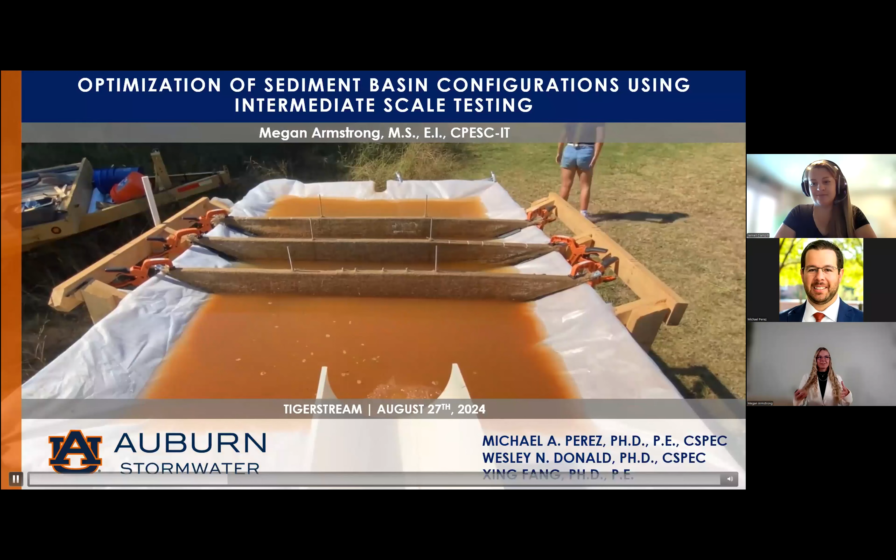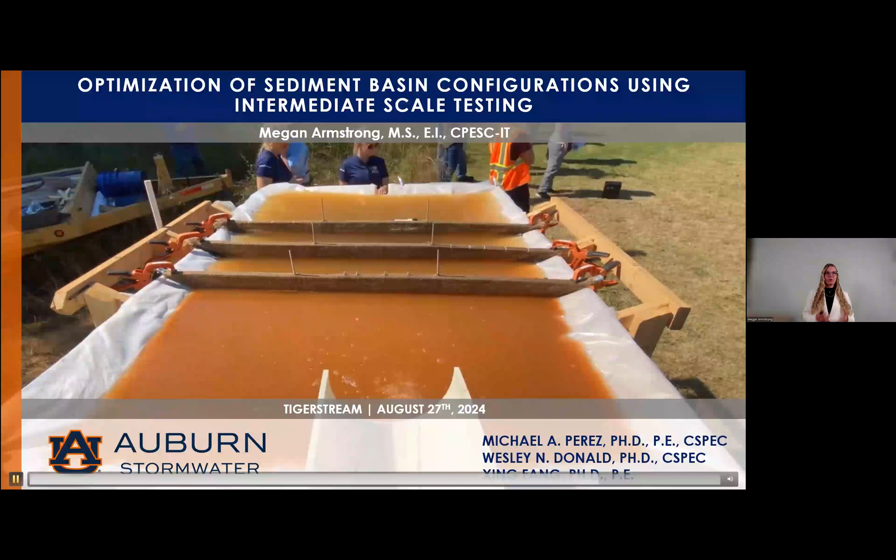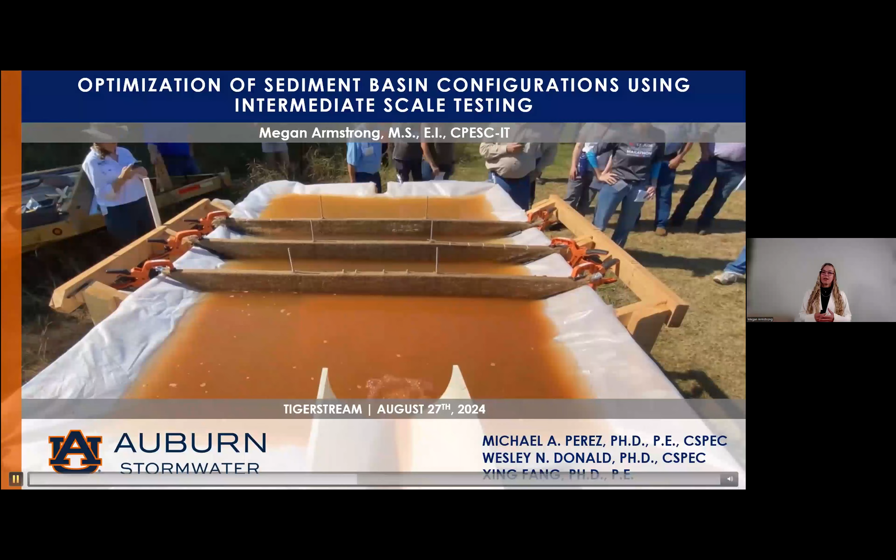So my project was entitled Optimization of Sediment Basin Configurations Using Intermediate Scale Testing. So we used different basin geometries, volumetric and geometric, and different treatment methods to look at how these parameters affected sediment capture within the basin.

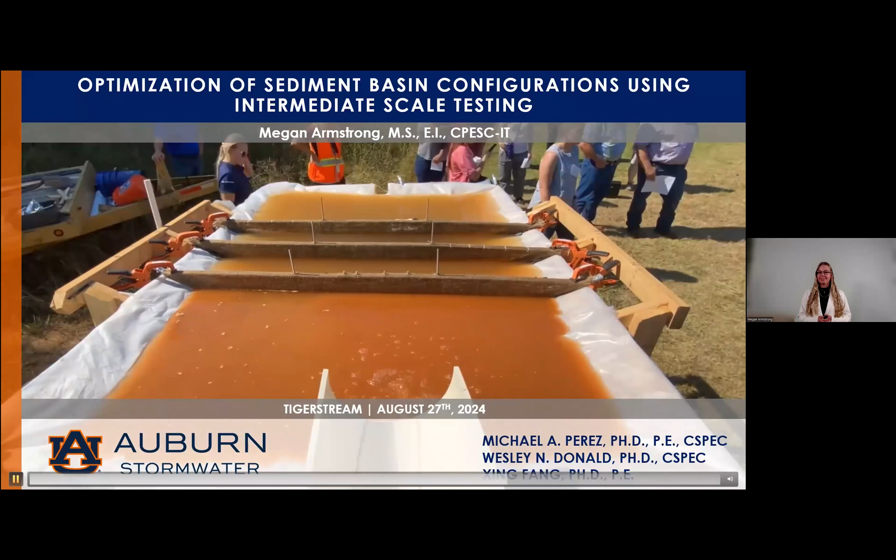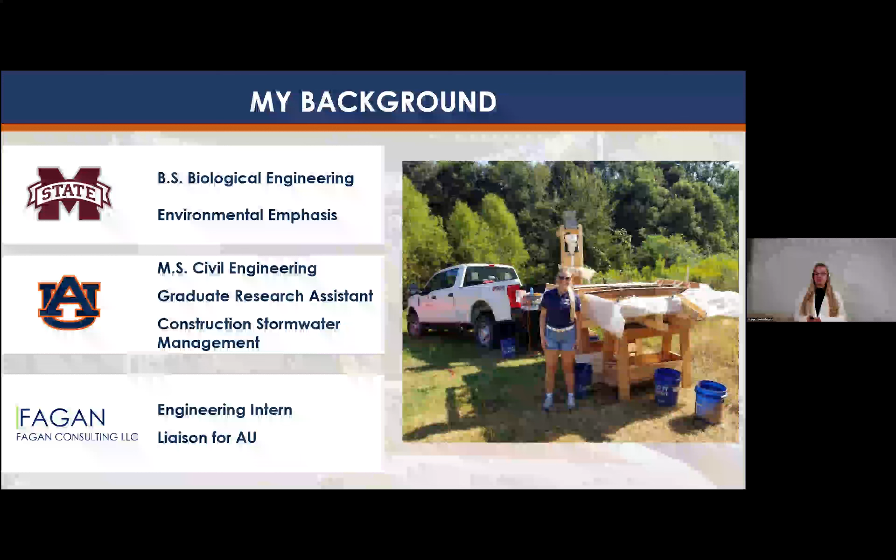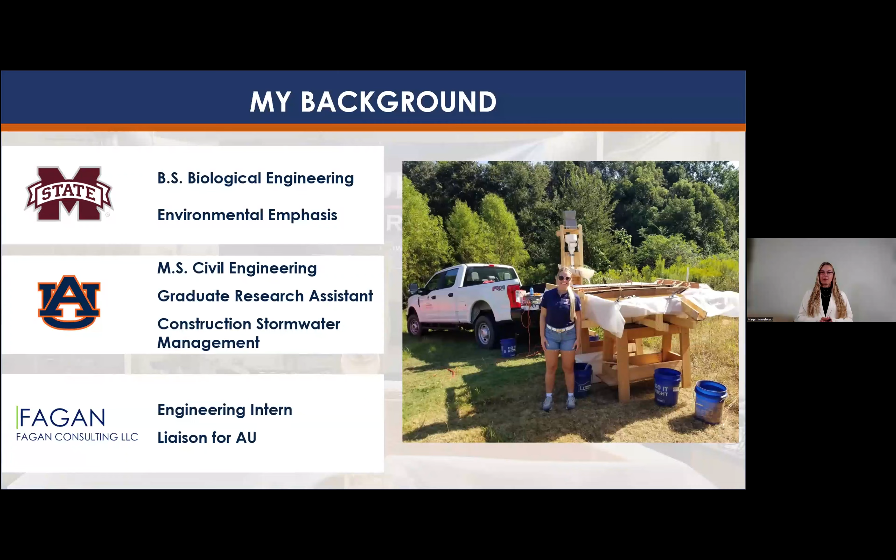So before we get into my project and stormwater in general, I wanted to give a little background about myself. So I went to Mississippi State University and got my bachelor's degree in biological engineering with an environmental emphasis. I recently, in the past year, finished up my master's degree here at Auburn in civil engineering, doing this project in the construction stormwater management group. And now, with my PhD project, I also work as an engineering intern for Fagan Consulting and sort of a liaison for Auburn University to Fagan.

So obviously we have a problem. Over half of our rivers and streams and almost 3/4 of our lakes, ponds, and reservoirs in the US are impaired. So you might be thinking, well, what's impairing these waters of the US? And the EPA actually identifies sediment as one of the most widespread pollutants affecting our water bodies, along with nutrients and heavy metals, which it also can act as a transporter for.

So in the construction realm of things, when you're starting construction projects, you're removing that topsoil and you are preparing to grade your land. And during that time, you might not have as much cover on the land as you would like. So this can cause higher erosion rates versus agricultural or forested sites due to those construction activities. This can lead to 1,000 to 2,000 times higher erosion than natural areas and 10 to 20 times more than your agricultural areas.

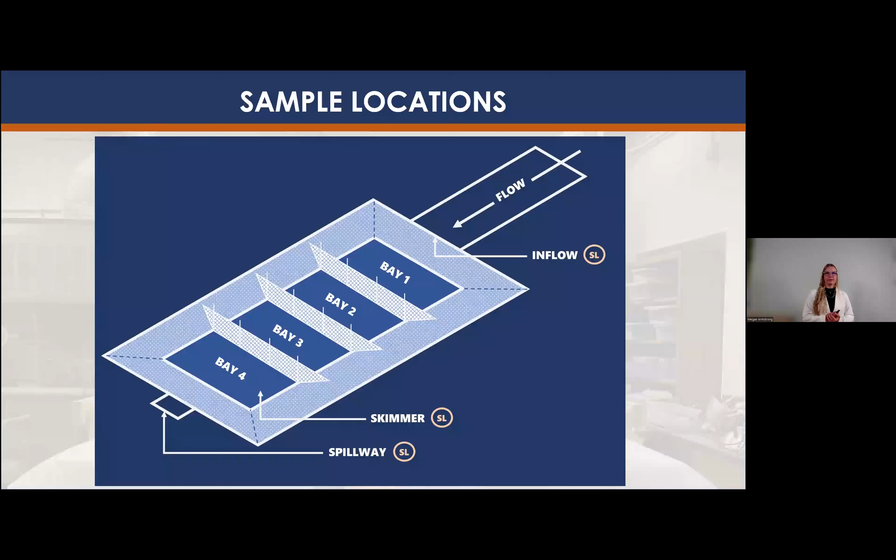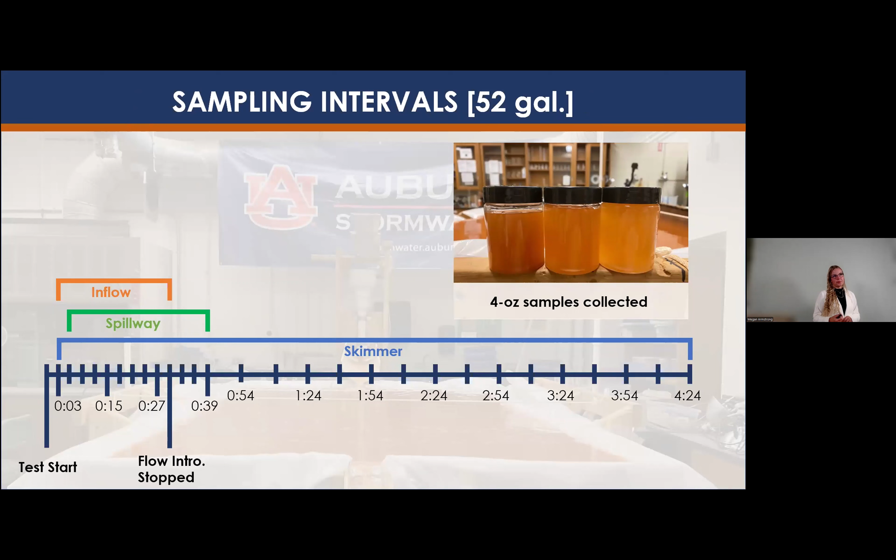The sampling intervals differ just slightly for the undersized basin. This was due to the limited amount of volume that we had, almost half the size of both of those basins. So our spillway overflow started a lot quicker. It started at 6 minutes, and we kept that until 39 minutes, which was the same time that we kept it for the standard and in-channel basins.

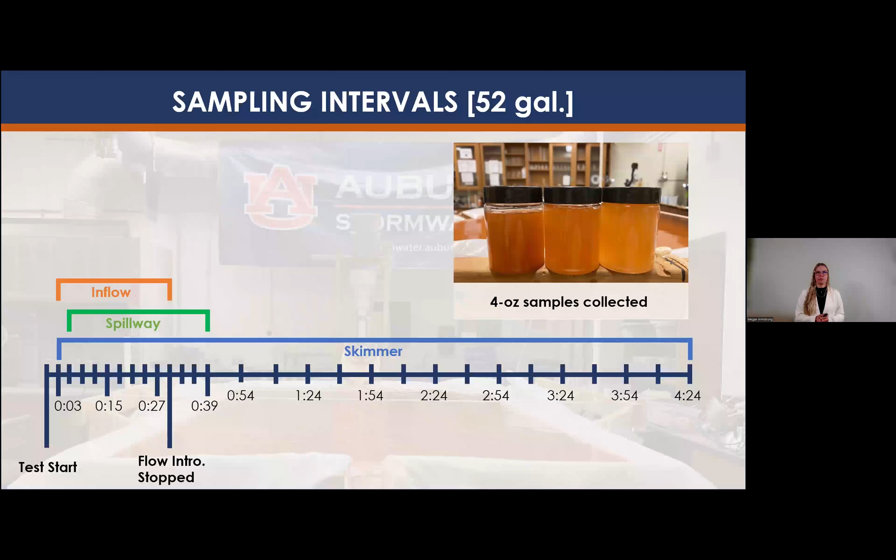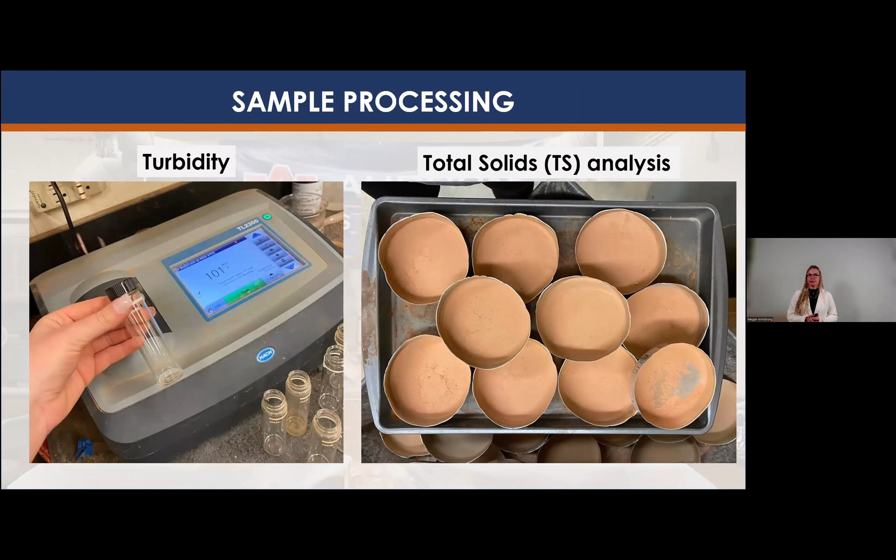For sample processing, we did turbidity measurements and total solid measurements. So this was to give us a correlation, a comparison of how the turbidity and total solids related during the duration of the test. And also for sample processing, we did a comprehensive mass balance analysis to track where all the sediment was introduced into the system and where it deposited in 6 different locations within the basin. So those locations were Bay 1, 2, 3, and 4, so all within the basin, the skimmer, and the auxiliary spillway.

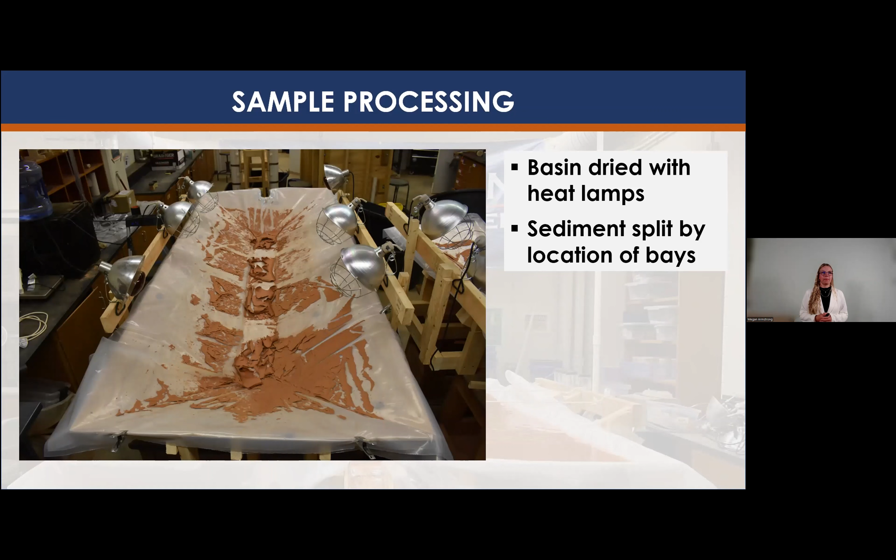So this was settled for 24 hours. The next day we would come in and we would pump it out from the top. We would dry the basin using heat lamps and then split the basin into the 4 separate bays.

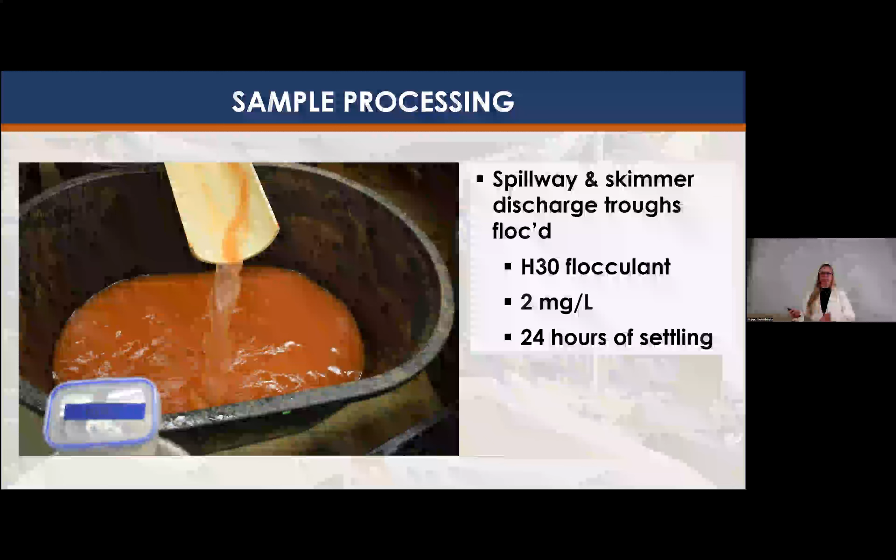As far as the sample processing for spillway and skimmer, these were deposited into large troughs. So what we had to do for these is we flocked them. We put the same flocculant in there that we used for our flocculant testing. And we let it settle for 24 hours before pumping it out. After that, we were able to get it into these metal containers, dry it, and then subsequently weigh it.

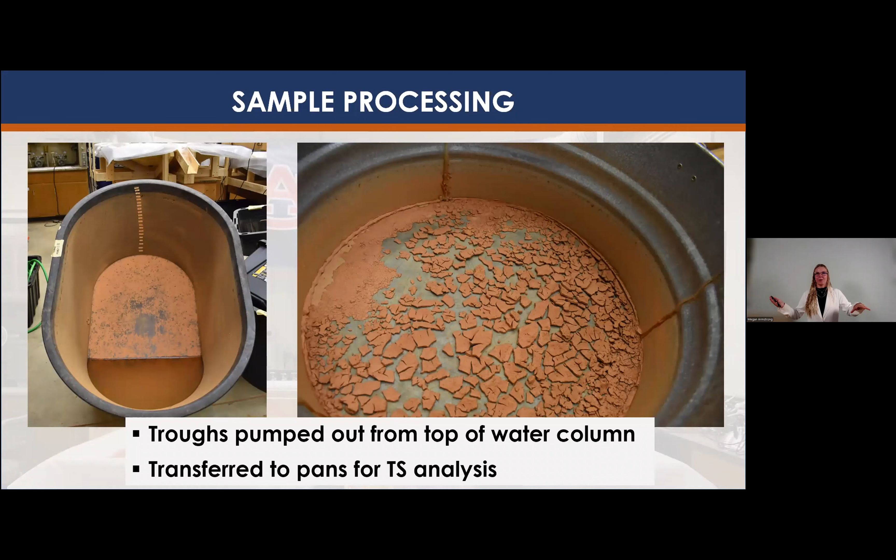So now to kind of get into the fun part, more of the results and what we found in the study. So I'll go through each different basin configuration that we did for standard, in channel, and undersize, and I'll talk to you about them all specifically. So to start off, we want to talk about no treatment. So this is our standard basin design with absolutely no treatments in it. So no energy dissipators and no skimmer.

And the reason that we did the test without a skimmer was due to the spatial constraints for the undersized basin. We could not fit our skimmer in there. So we wanted to make these comparisons directly to that undersized basin. So that's why we did these.

In no way, shape, or form in this study or in this presentation am I trying to say that skimmers are a bad idea. Skimmers are a great idea. We believe that they work. Properly sized skimmers do work. I'm just wanting to lay that out there because there were some configurations that we did not use these floating surface skimmers. So to get started on this, we have no treatment methods.

What this R means here is the amount of sediment actually retained within the basins. And that's looking at how much we actually put into the basin versus how much was captured in these areas. And then we found that for the O here, that's our outflow, our spillway, 16% of that sediment that was introduced left through the spillway.

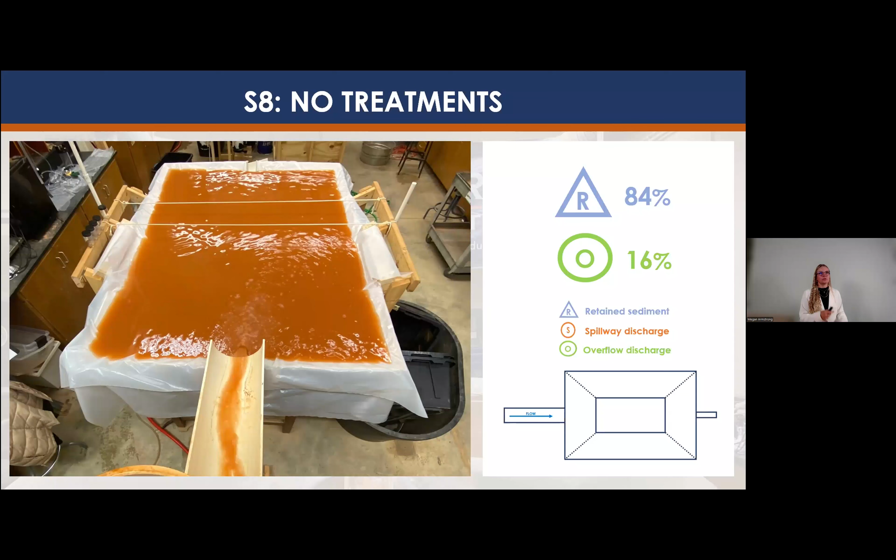So now we have the sediment retained. We have a skimmer, that's that orange S there, and then the overflow or spillway, which would be that green O. And so this is a picture, when I was a new grad student, I didn't realize how much photography we were gonna have to do. So for this one specifically, I just had an older picture, so that skimmer does not replicate the actual skimmer that was used in this basin. We did use the same skimmer throughout all of the configurations that used it.

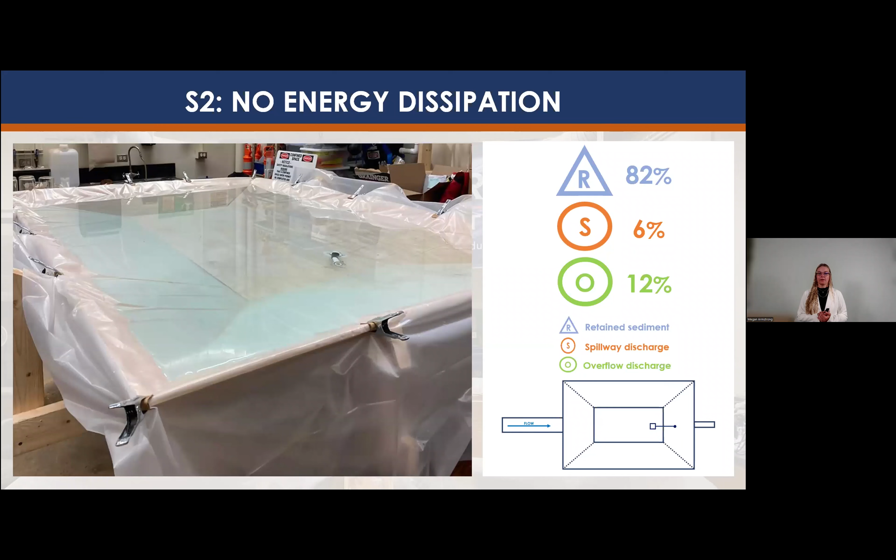So in this basin, we had no energy dissipation, but we did have the floating surface skimmer. And we found 82% sediment was retained within the basin, 6% left through the skimmer, and 12% left through spillway overflow. So in comparison to our no treatment methods that I just mentioned, this is a 4% difference leaving through the overflow. And like I mentioned earlier, we really used the spillway overflow to compare all of these basins to see how much sediment we would possibly be discharging offsite.

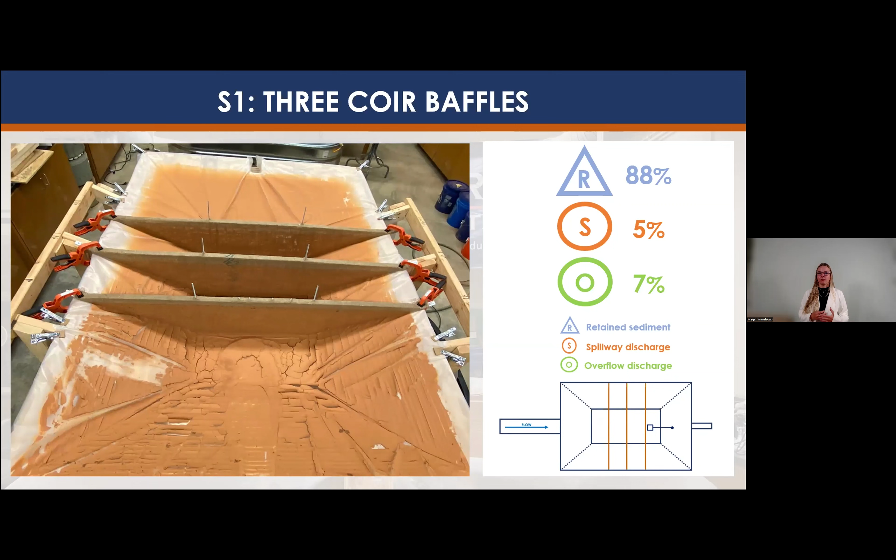So talking about that study that I mentioned earlier from the literature review, it said that the first baffle really did a lot of work in reducing velocity and for sediment retention. So we wanted to look at what would a single coir baffle look like in our setup. So what we found here is that with the single coir baffle instead of 3 coir baffles, we were able to retain 86% of sediment. So that's just a 2% decrease, and just a 1% increase in that spillway overflow to make it 8%. So not too significant of a change here. We saw that 3 baffles could be comparable to 1 baffle.

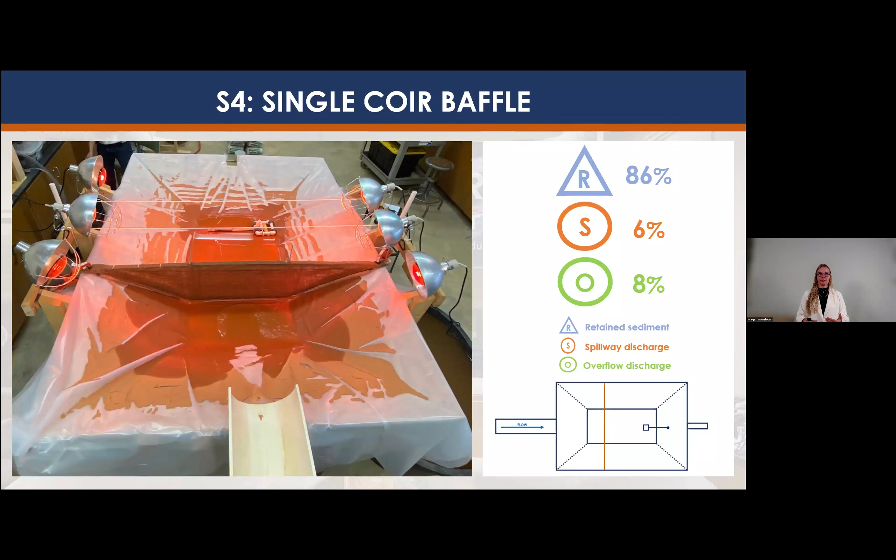Talking about the modeling study mentioned in the literature review, we saw that increasing the flow path from inflow to outflow for sediment particles could increase the amount of sediment captured. So we wanted to try a more serpentine or elaborate flow path, where flow goes between serpentine baffles, creating a longer path from inflow to outflow. With this configuration, we saw 89% of sediment retained within the basin and 7% overflow, so no change from the first three coir baffles as far as overflow spillway goes.

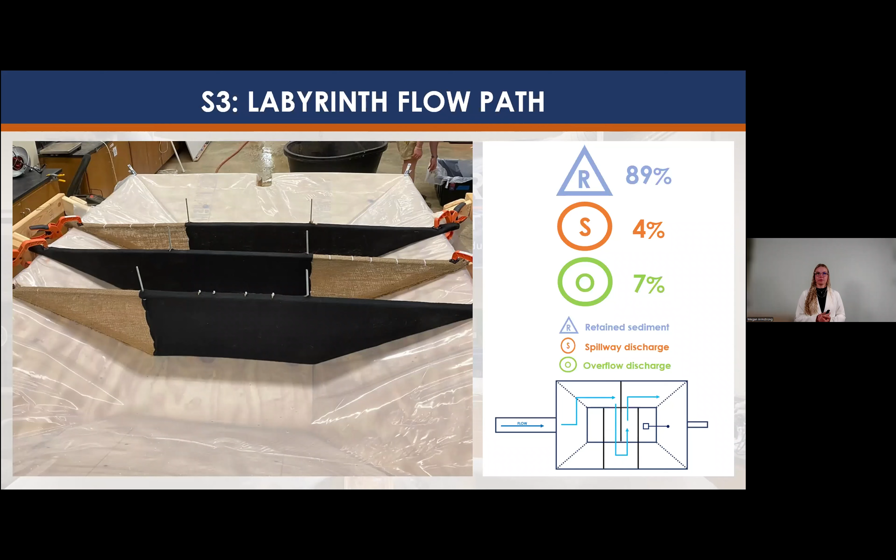Another study we looked at, in New Zealand, showed the effects a level spreader could have on sediment retention, so we wanted to try this configuration. This level spreader is at 9 inches. In future studies we might try a level spreader with different dimensions, because in this one we didn't see any significant results for sediment retention within the basin. It was a little less effective than our coir baffles, but at field scale we would probably change the height of that level spreader.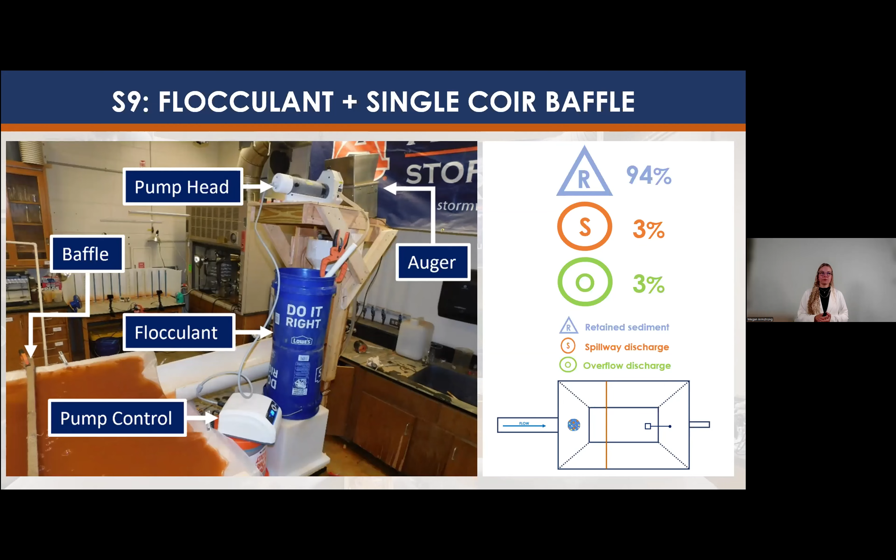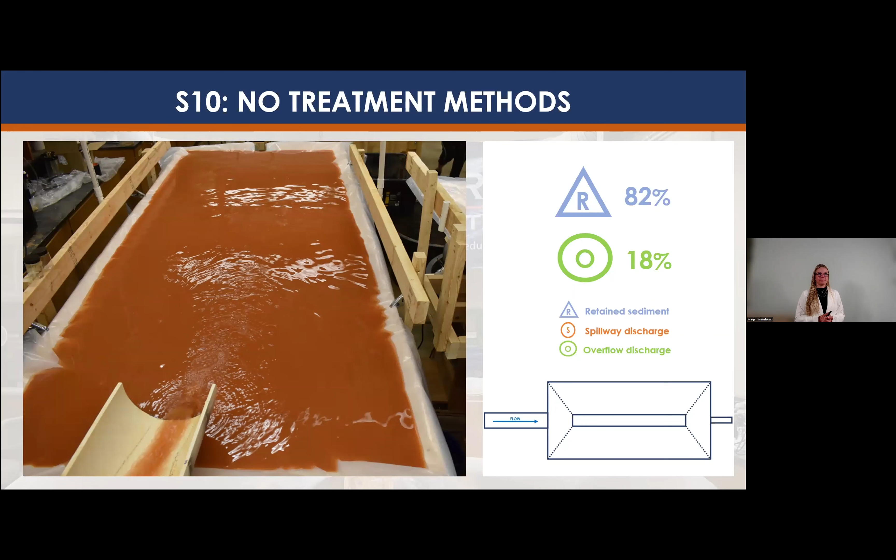Moving on to the in-channel basin, which would be found, say, in a roadway median or roadway channel. Our goal was to increase the residence time, or the particle flow path length from inflow to outflow. We found 82% of the sediment introduced was retained within the basin, and 18% discharged through the spillway. This is a 2% increase in sediment discharged to the spillway compared to the first, standard basin with no treatment methods. We believe this could be due to increased velocity within the basin from its length-to-width ratio, but nothing too significant compared to the standard basin—they worked similarly.

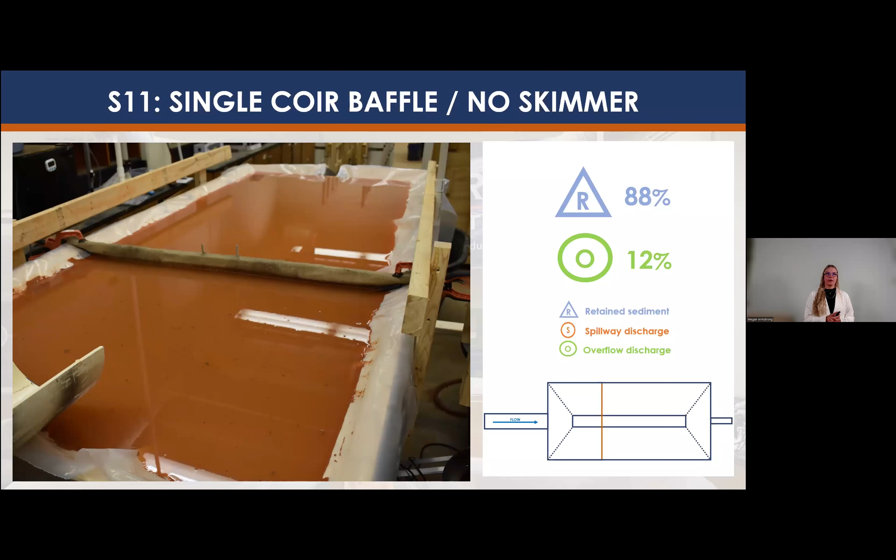So we wanted to try the single coir baffle like we did in the standard basin, this time with no skimmer, to make comparisons to the undersized basin. We found 88% of sediment retained within the basin and 12% through the spillway outflow, a 4% increase in sediment discharge compared to the standard basin with a single baffle and skimmer. That standard basin did have a skimmer, which is one reason the overflow turbidity, or amount of sediment, is increased here.

We also wanted to try the ALDOT configuration, or the ALDOT standard with three coir baffles, in our in-channel basin. We had 86% retained within the basin, 5% leaving through the skimmer, and 9% discharged through the outflow. Again, this was a 2% increase compared to the three baffles and skimmer in the standard basin.

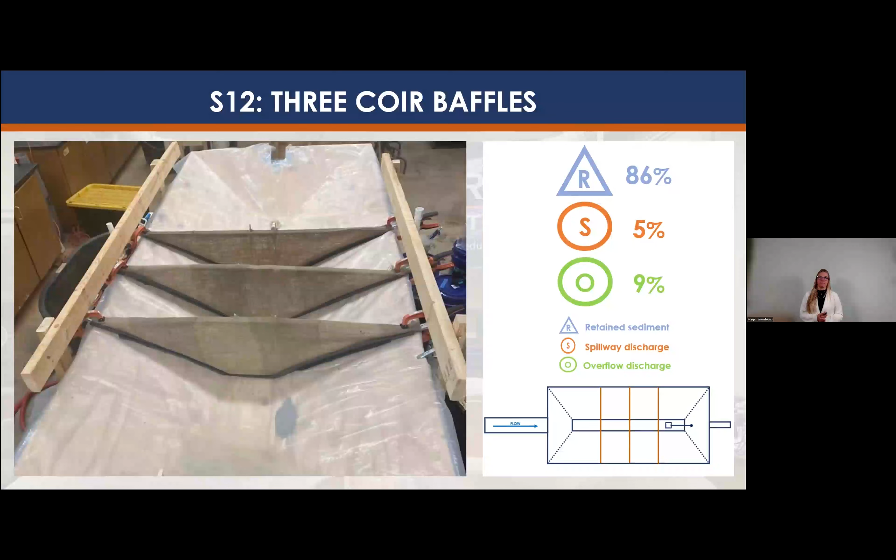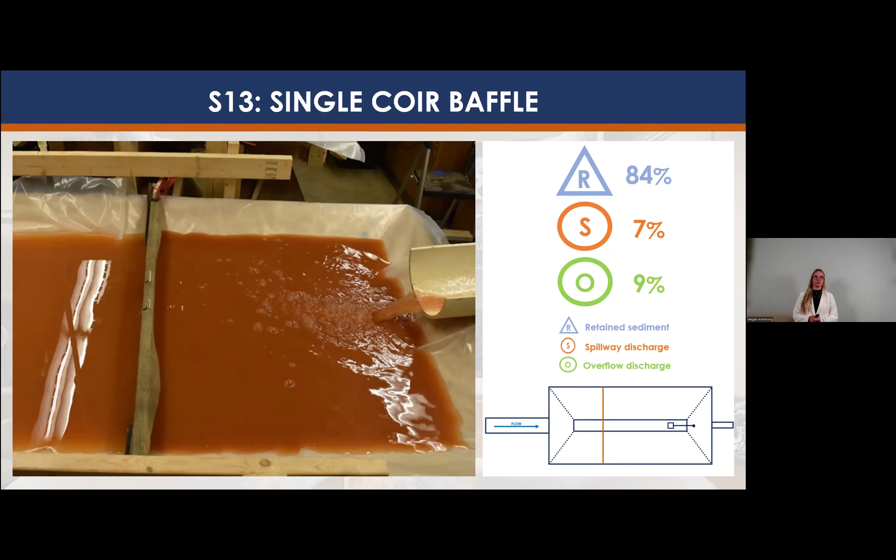We also tried a single coir baffle, which did include a skimmer. We found the same thing again: 84% retained within the basin, 9% overflow through the spillway. This was a 2% increase compared to the standard basin with a single baffle and a skimmer.

We got pretty consistent results with these two basins compared to each other. Again, we wanted to try that flocculant, since we knew it worked really well in the standard basin, so we wanted to replicate it in our in-channel basin. We did a configuration with flocculant and a single coir baffle, this one with no skimmer. You're looking at 95% retained within the basin, 5% through overflow.

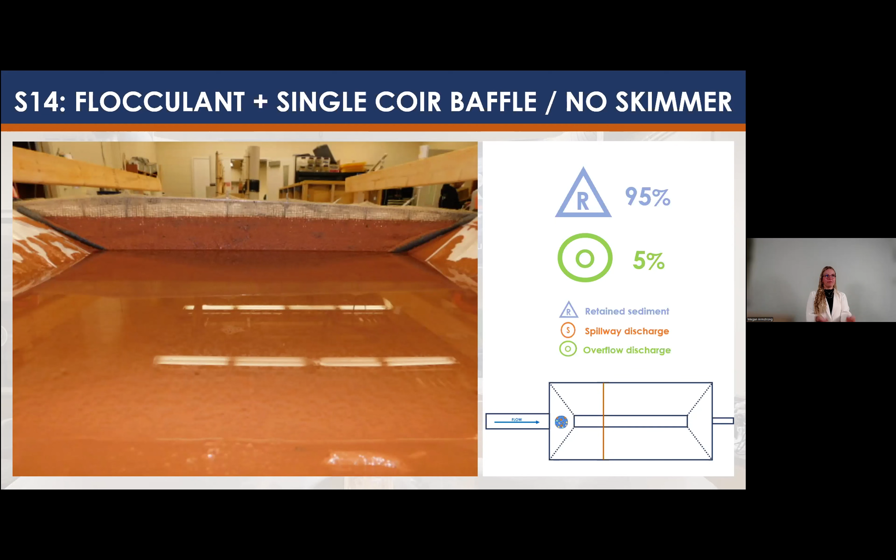Again, we wanted to do this including the skimmer to see what effects that would have. We saw 2% through the skimmer, 94% retained, and only 4% discharged through the spillway itself, which made it the most efficient in-channel basin configuration that we tested.

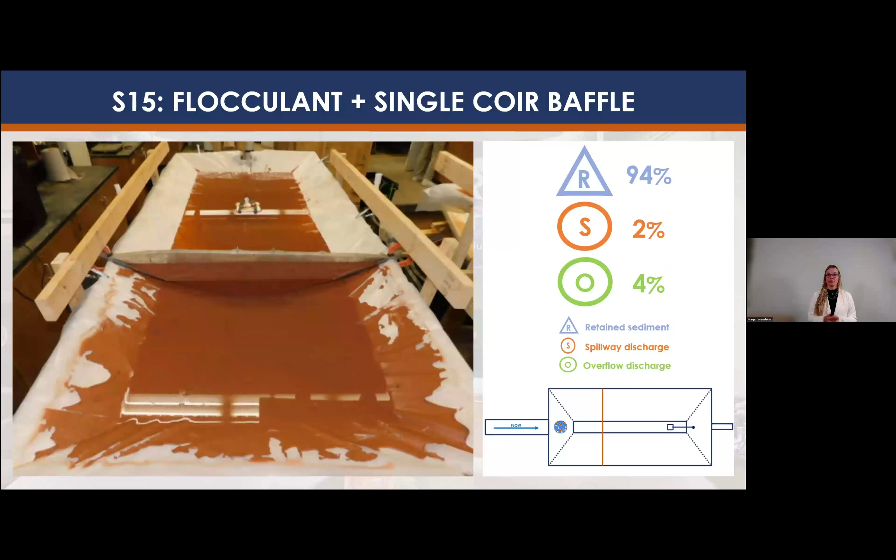For the undersized basin, we were really excited to get to this part. We wanted to see the comparisons between those larger volume basins and the smaller volume basin, and how it would look with no treatment methods.

With no treatment methods, we were retaining 64% of sediment, and 36% was leaving through the spillway overflow. So this is a 20% increase, a huge increase compared to the other two basins that performed pretty similarly.

A 20% increase discharged through the spillway compared to the standard basin with no treatment configuration, and an 18% increase compared to the in-channel basin. Very drastic results here.

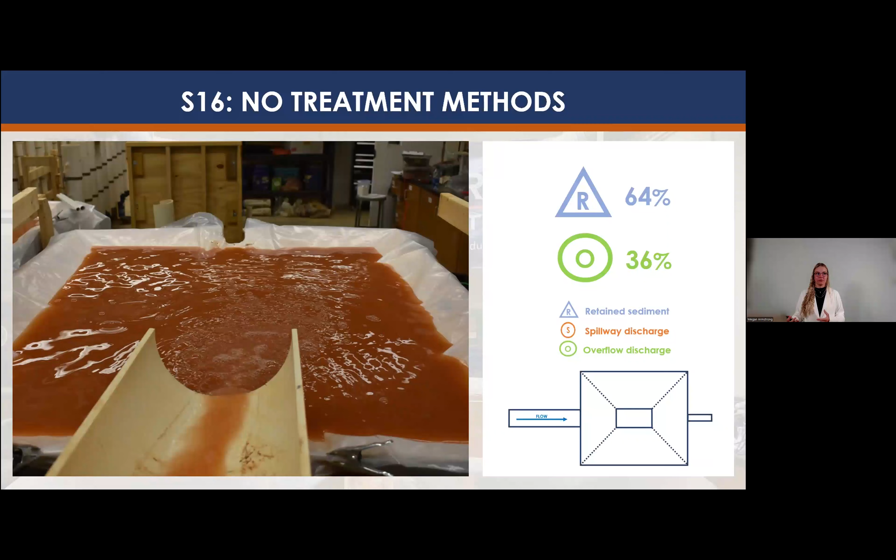We also wanted to try the single coir baffle, since that seemed to work pretty well in our other two basin configurations, so we wanted to see how it could improve sediment capture within this basin. We were able to see 73% retention within the basin, an improvement from no treatment methods at all.

27% was leaving that overflow spillway with the baffle. So a 19% increase compared to the standard basin with a single baffle, and a 15% increase compared to the in-channel basin with a single baffle.

This was one of our favorite ones that we ran. We were really excited to see what flocculants could do for an undersized basin with the single coir baffle. Would we really reduce that turbidity downstream, or reduce the amount of sediment leaving the basin itself? How big of a change would this be?

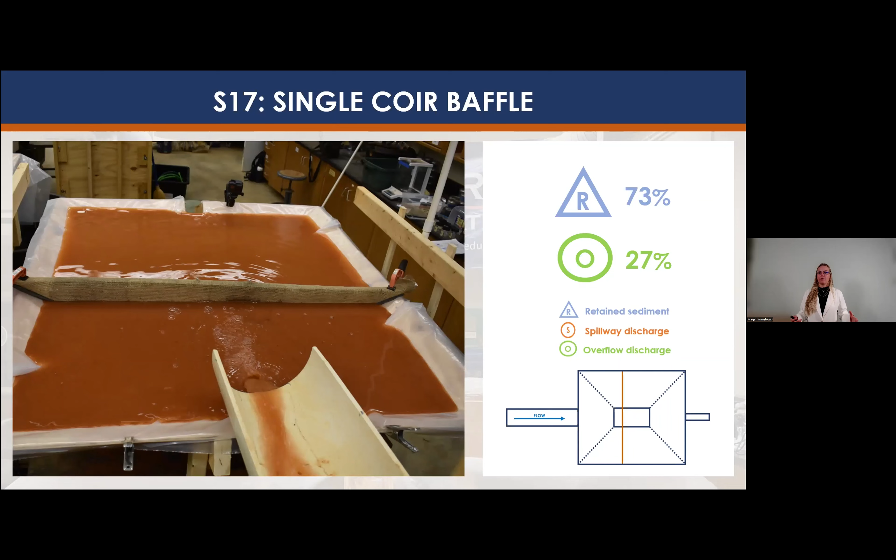For the flocculant configuration, we were able to get 91% of the sediment introduced retained in this basin. This is the same storm volume that we introduced into the standard and in-channel basins, almost 6 pounds of sediment, just like the other configurations. Retaining 91% of that sediment was huge.

We're almost working as effectively as the flocculant installations for the standard and in-channel basin. This is actually an improved sediment retention value compared to the configuration with three coir baffles in the standard configuration, which had 88%.

Here we saw 9% through spillway overflow. Like I said, we use this spillway overflow number to compare across all basins, since they didn't all contain those skimmers.

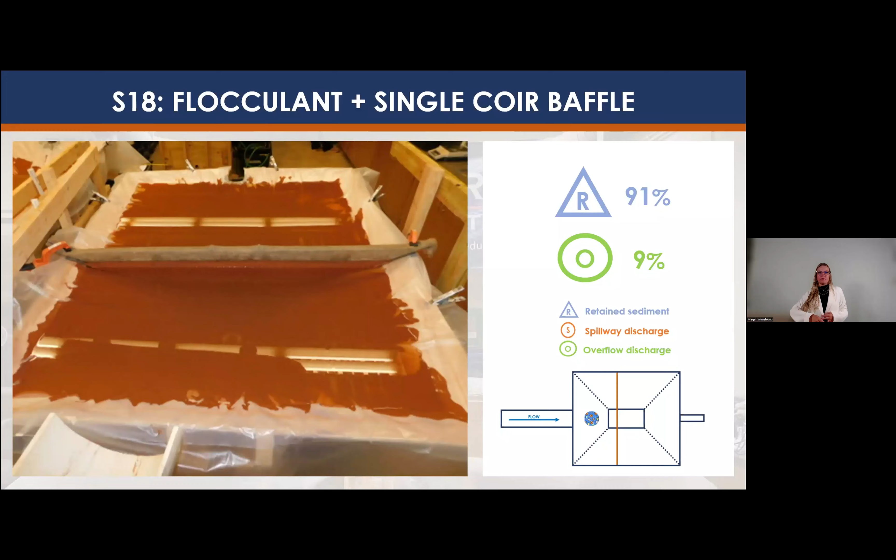So here's an overall efficiency summary for the 18 configurations that were tested. In yellow, we have all the standard basin configurations. In red or pink, we have the in-channel configurations. And in blue, we have the undersized configurations.

You can see from these configurations each of their outflow spillway percentages, how much of that sediment introduced was discharged through the spillway. We really wanted to highlight our flocculant, or chemical flocculant configurations here. We have 3% leaving the spillway outflow for the standard basin, 4% for the in-channel basin, and 9% for the undersized basin.

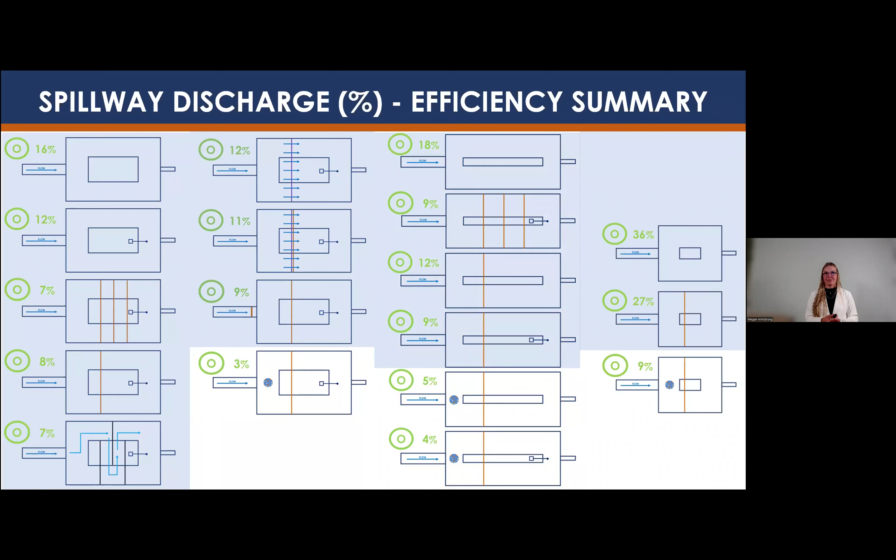Those numbers are a lot closer than when we were looking at the undersized basin with no chemical flocculants added. This graphic also shows the flocculant compared to no flocculant for the spillway turbidity reduction.

For the standard basin, we have 3% discharge to the spillway using flocculants, compared to 8% without any chemical flocculant treatment. For the in-channel basin, 4% using chemical flocculants, 9% without them.

For the undersized basin, one of our more significant values from this study, 9% through the spillway outflow using half the volume basin, compared to 27% without the chemical flocculant treatment. All of these comparisons are with the single coir baffle included.

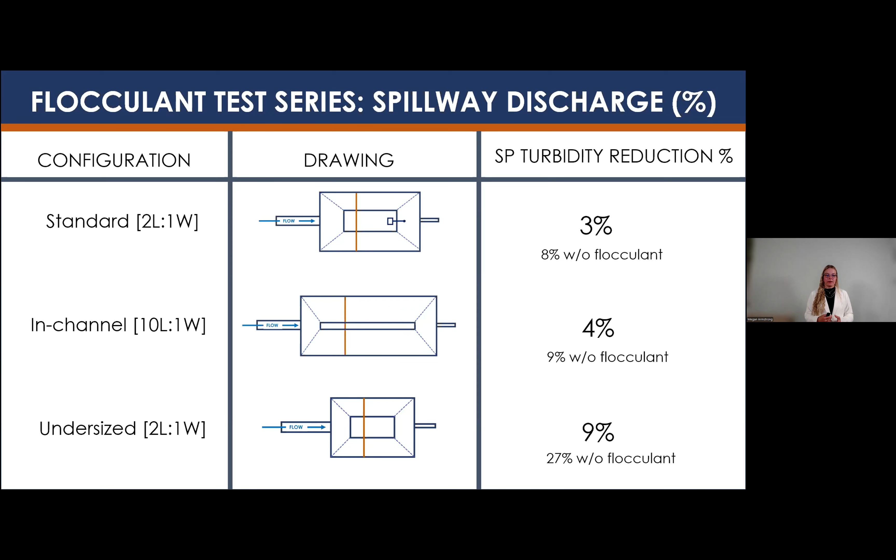Along with the amount of sediment discharged through the spillway, we were able to see what the installation costs of these are. So we used a basin, assuming just a 1-acre contributory drainage area, and we assumed just a standard square footage around each of these basins to provide costs for land.

We did include the cost of chemical flocculants in each of the chemical flocculant configurations, as well as skimmers for each. So we took all of this into account, used ALDOT bid prices from past projects, and found that the standard basins average around $23,000, in-channel basins around the same, but to use less land footprint for the undersized basin, we're talking about $17,000 per basin.

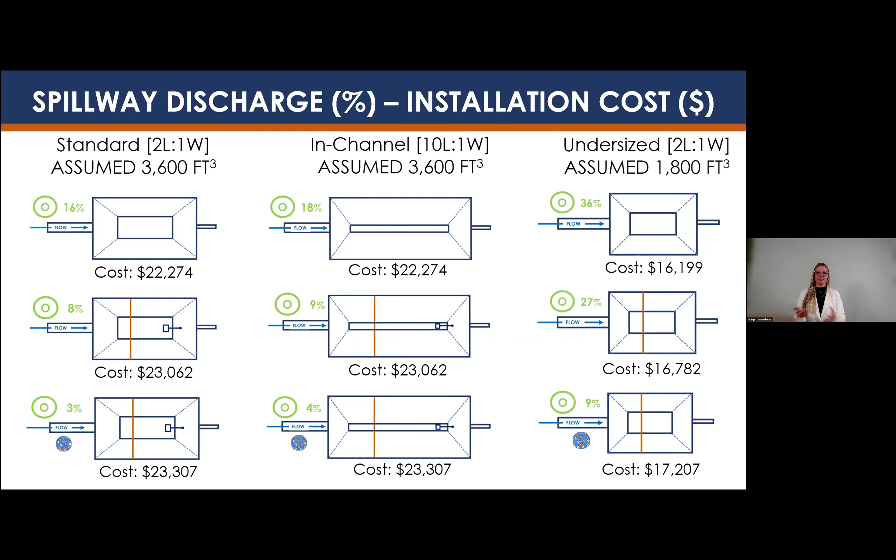This is a pretty big decrease, almost $6,000 here. If you think about all the basins built in the state of Alabama or just in the US, that's a lot of money you could save on these projects. Here we wanted to do a direct comparison from our ALDOT standard to our undersized basin with chemical flocculant use, and again there's a little over a $7,000 difference from what we currently use to what could also work, depending on how this experiment looked in the field.

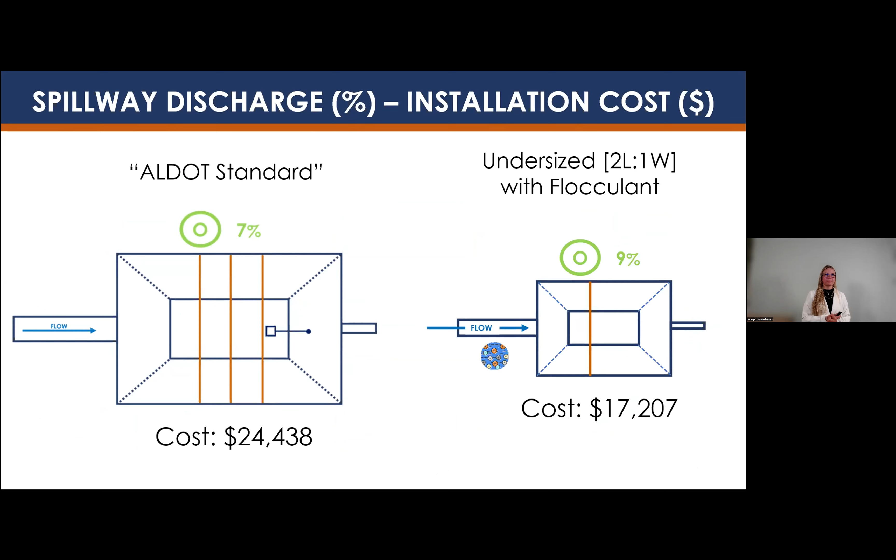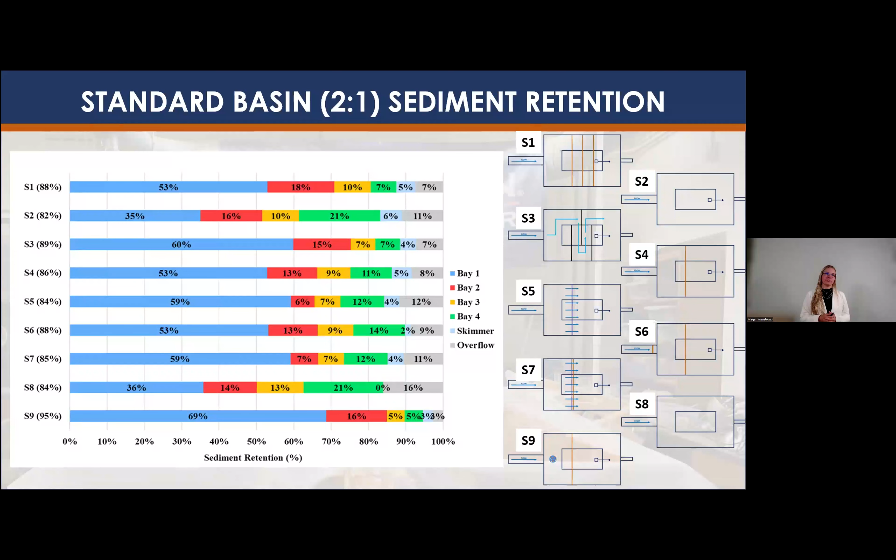And then on the side, I provided all the icons so you can match it up to which configuration we're discussing here.

Again, for the in-channel basin, this was another thing that really stood out. You can see how providing those treatment methods, those energy dissipators in the form of coir baffles, really helped increase the amount of sediment retained in Bay 1 and also decrease the amount of sediment leaving through your overflow spillway. But when you put the chemical flocculant in, again, the basin showed that it can retain almost 70% of the sediment within that first bay.

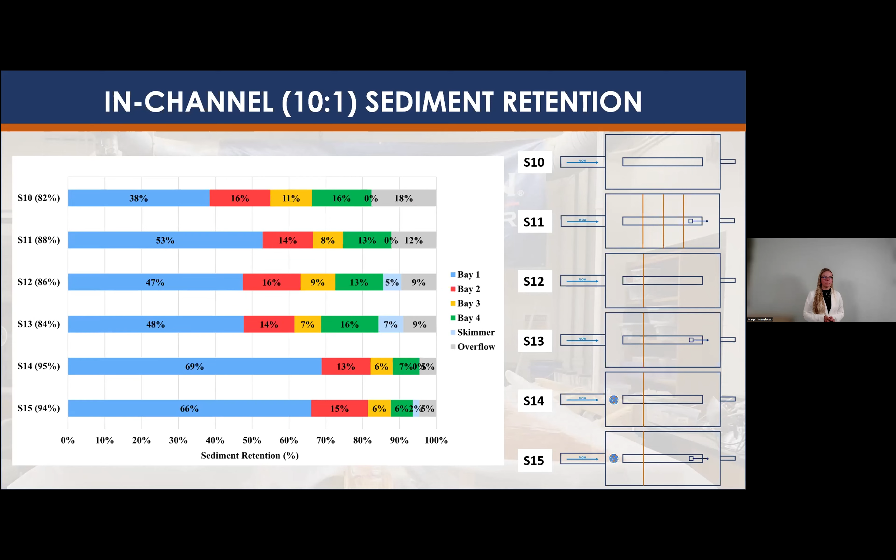Then going to the undersized basin and where the sediment was retained, again you can see the same pattern. There's more sediment discharged through the spillway for those first couple configurations. The first configuration without any treatment is 37%, and 27% for the configuration using the single coir baffle, so that's a 10% difference just by using that baffle.

And then over a 20% difference in what was retained in Bay 1. But then we look at the flocculant configuration, and you can see again that almost 70% of the sediment introduced was retained within that first bay.

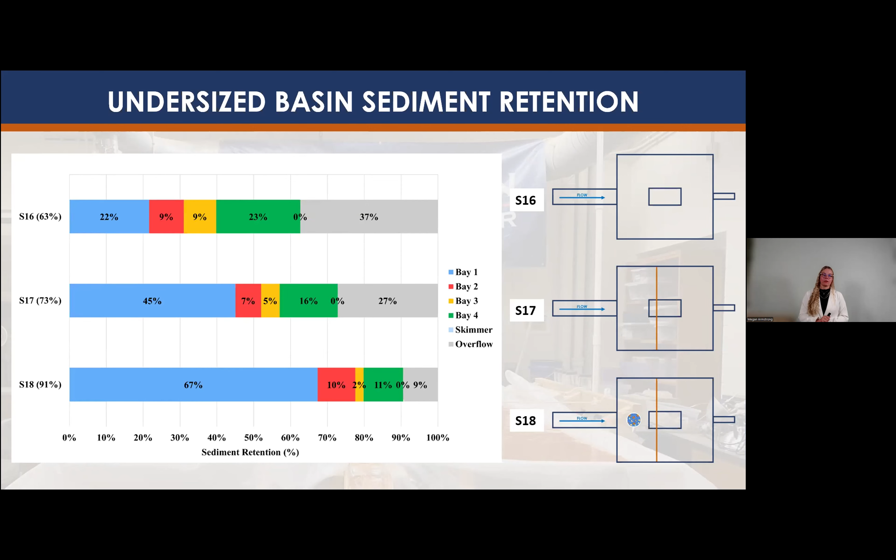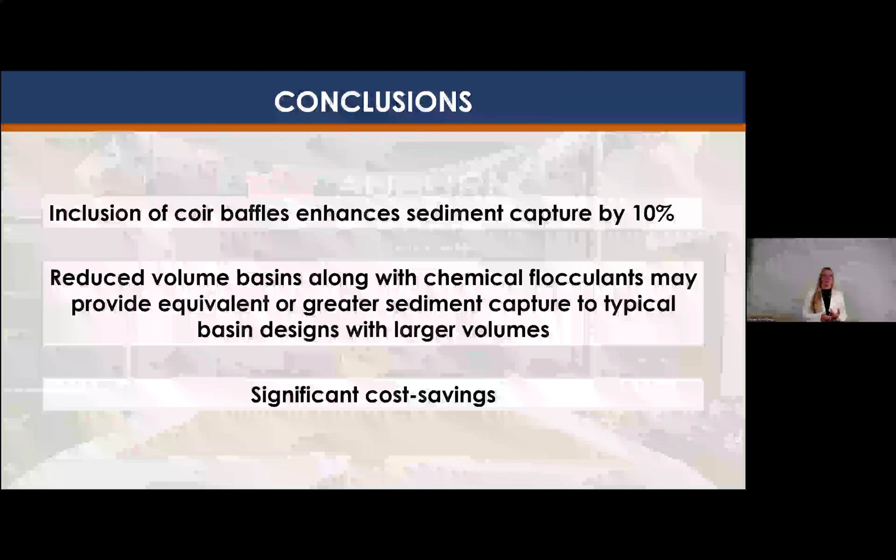So some conclusions about the project: we did see that the inclusion of coir baffles can enhance sediment capture by up to 10%. We also saw that reduced volume basins, along with these chemical flocculants, may provide equivalent or even greater sediment capture compared to typical larger basin designs. And again, this could promote some cost savings.

So for future research, what we want to pursue down the line would be large-scale field-scale tests to replicate this study in the field, to see if it works as we think it would, going from our intermediate setup to a large-scale setup. Also varying length-to-width ratios, including doing the 2-to-1 length-to-width on the bottom dimensions of each basin. So evaluating different ratios like this, and field monitoring basins to get more data to run these field scale tests.